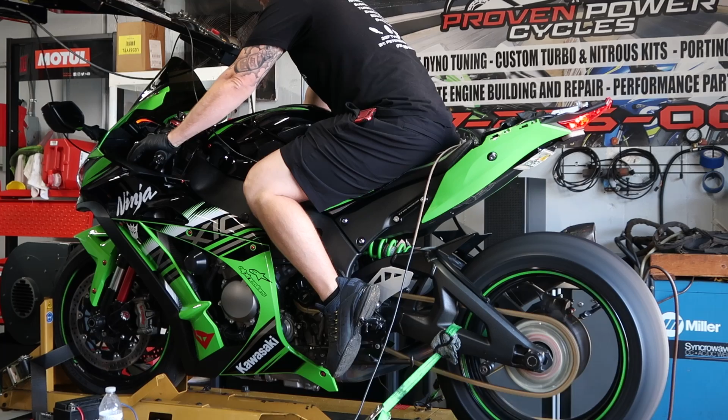It's an issue that a lot of people can't really catch until it's kind of too late. Can you spot it?

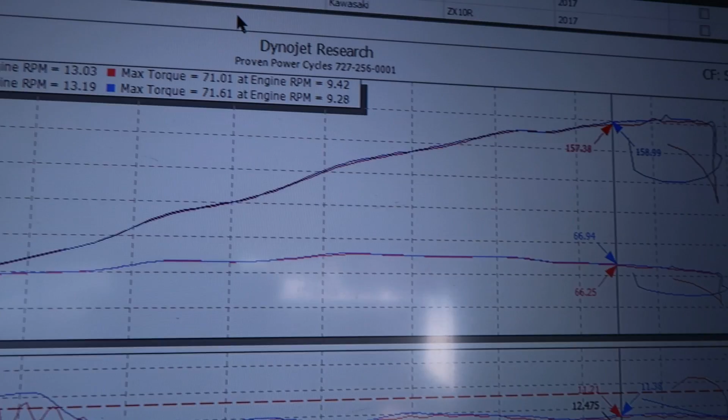I'll give you a hint. I'll let you look at this graph. I'll give you a couple of seconds. Can you spot it? Can you see any of the issues?

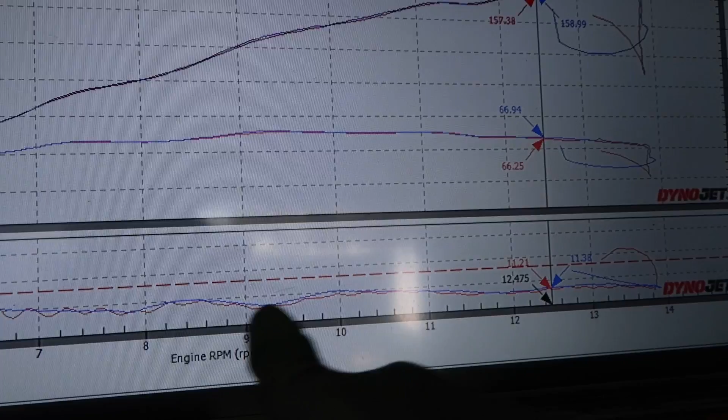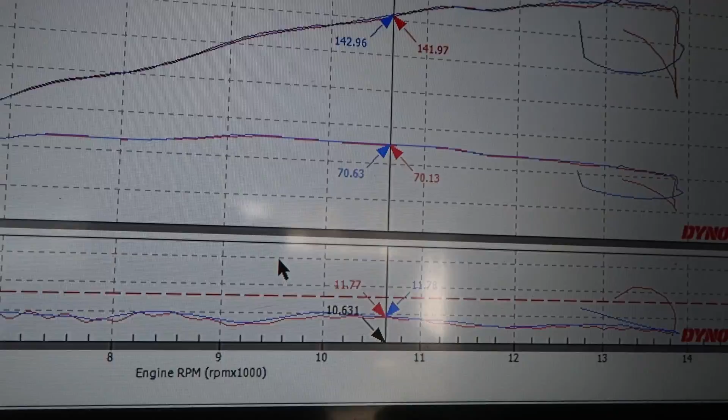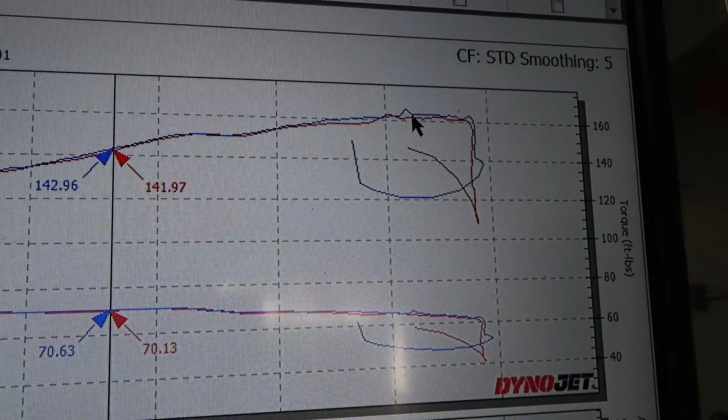There's a couple. We're running very rich, extremely rich AFRs. We're 11.2, 11.3, 11.1 all the way here at top end. We're at 11.7 here. It's just overall insanely rich. But notice right here, you see this dip down and then it comes here and you see these little peaks, how it kind of goes up into a peak and then it comes down, and then right here it kind of goes up into a peak and then flat lines again. That is a slipping clutch.

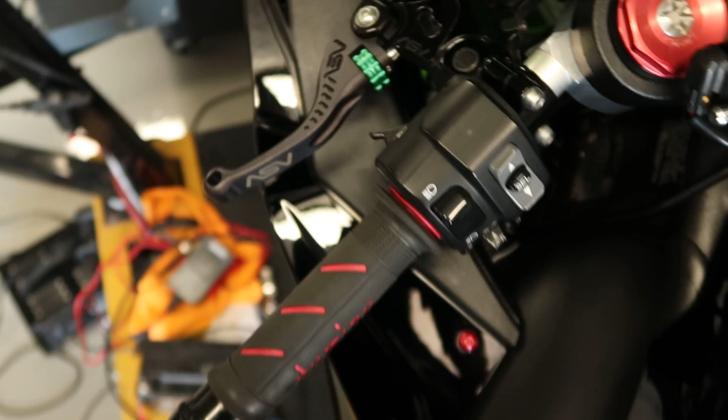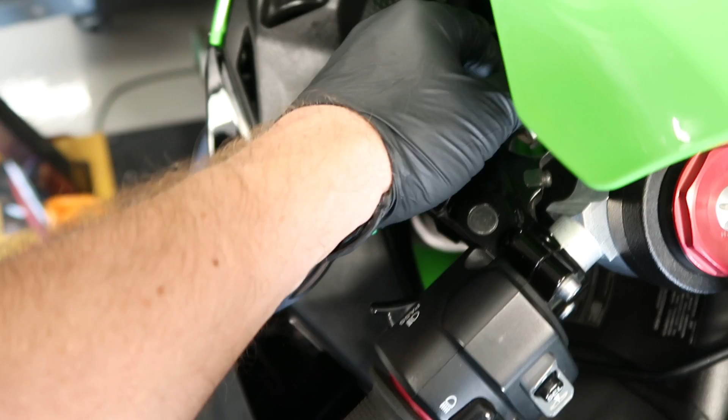That's how you diagnose a slipping clutch on the dyno. And it makes sense because as I felt this lever, look how tight it is. This thing is stupid tight. There's no play right here, right? You're supposed to have a little bit of play, and it looks like somebody already tried to do the adjustment on here. So what we're gonna do, we're gonna go through this real quick and we're gonna get this adjusted right for the guy and hopefully salvage this clutch.

So yeah, this is really tight. It's got a really stiff grab. Now I don't know if he's got any clutch mods, but just in general, this is way over tightened. Now some people do this thinking that their clutch is gonna grab harder. That's not the case. What's actually happening is you're not relieving the clutch plates of pressure.

So when you pull that lever in, it's supposed to release the clutch plates so they're not slammed together. Well, when you over tighten that, what you're doing is you're actually pulling and slightly separating the plates, so they're never fully grabbing. They're basically glazing each other. So it's gonna cause premature wear, it's gonna destroy the clutch, and way less mileage than it normally otherwise would be. Just because it's more or less like leaving your hand on the clutch slightly pulled.

It's more or less doing something like that. That's what basically you're doing when you over tighten the cable. Once we fix that, we're gonna rerun it again.

It is running a rich AFR no matter how you slice it. Air fuels are definitely rich, so it definitely needs a retune. I believe he said this bike was tuned already. I'm not sure, but no matter what, we need to fix this clutch issue, and then we'll go from there and address the tuning issue.

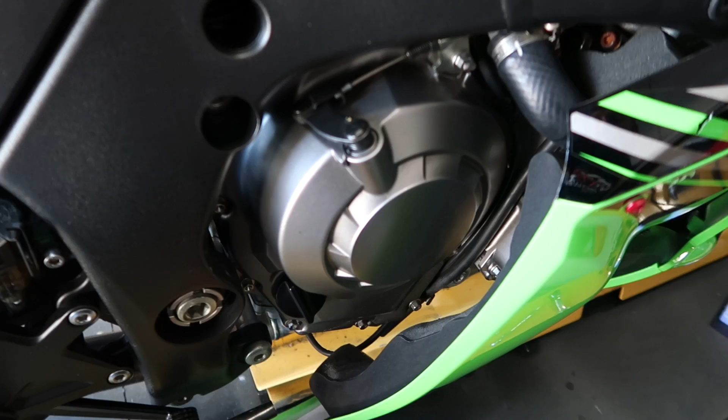So now I already adjusted it. Admittedly, it was pretty tight, but basically this is what you want it to look like. You want to have that little bit of play, okay?

When you over tighten the clutch, what you're doing is you're pulling this actuator arm in, right? So the tighter you pull, and here I'll show you at the adjustment up at the top. As I tighten that up, this line will get tighter and tighter and tighter, okay?

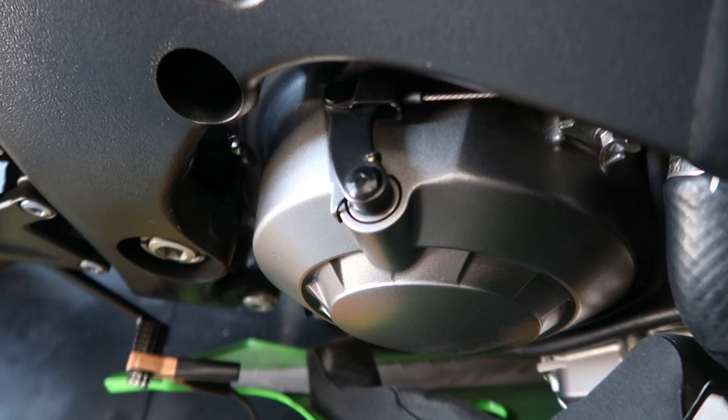And what ends up happening when you tighten this up, what do you think when you pull the clutch in? The clutch, the lever, and I'll show you, goes in, okay? That's me pulling on the clutch. I'm pulling the clutch in, I'm letting the clutch out, okay?

When you over tighten the clutch cable, you literally are pulling this as if you slightly have your hand on that clutch lever, okay? So I just wanted to show you guys a different angle of it, but more or less this is what you want. You want there to be just a little bit of play so you know that there's no pressure on that pressure plate and the clutch plates from that lever being squeezed in, or again, it being over tightened.

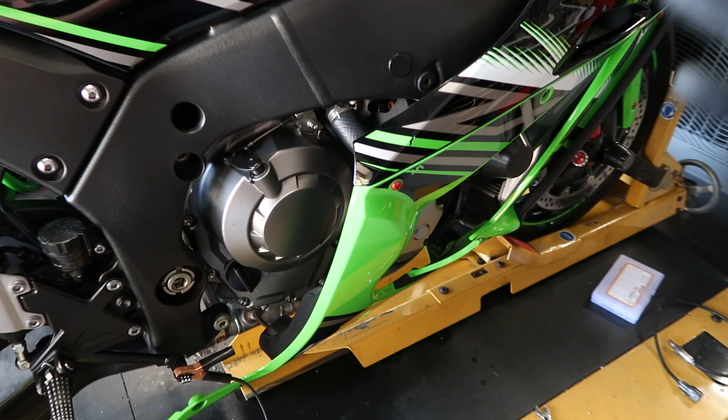If we're still having a slipping clutch issue, even though we just adjusted it and everything, if the clutch is already kind of gone and it needs to be gone through, I'm not gonna tune the bike. We're not gonna push it. I'm not gonna sit here and beat on it. There's no reason to do that.

All that's gonna cause is just more and more problems on the bike. We're just gonna be burning up little fibers and dumping it into the oil. So, you know, we're not gonna do that. That's not what I do.

So we're gonna check it. We're at least gonna check it. If the clutch is grabbing, everything is good, we'll say, let's go, we're fine, let's tune it. We're getting ready to re-baseline it again and see what it does now that the clutch is all adjusted. Hopefully this thing's salvageable. Hopefully I caught it in time. We'll see. Let's see what it does.

Alright guys, so it's been a little bit since the last little video that I just took, and I kind of wanted to catch you all up to speed. So we did resolve the clutch issue by readjusting the clutch. We got that dialed in.

The bike has been tuned before. There's plenty of signs in here. One of the most obvious ones was that when I went to go read out the ECU, it was locked by another tuner on the Woolich network. So we were waiting on Woolich to unlock the ECU for us. We got access to the ECU. We just rewrote our own little bench map in it. I have no idea how it's gonna perform, but let's see.

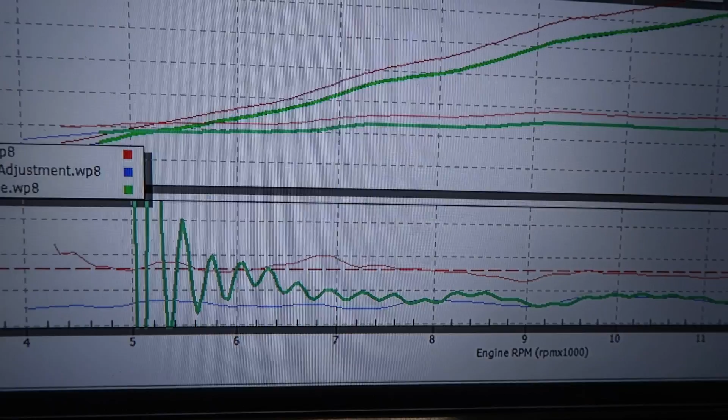Now, ignore the air fuel, we had a little issue with the sensor. It was kind of warming up still, it looks like, we were just having some glitches with it. So anyway, 162 with 71 foot-pounds of torque.

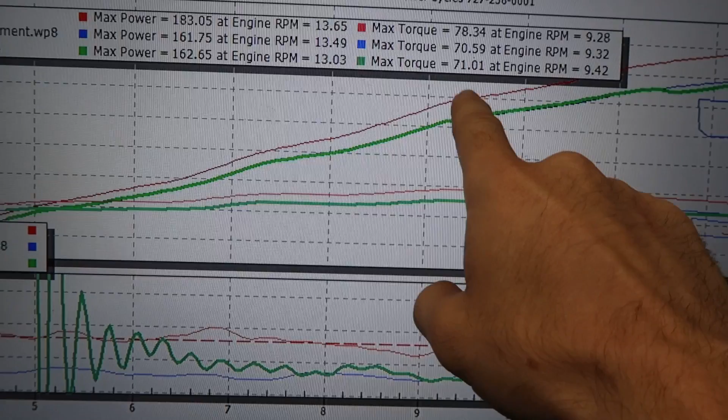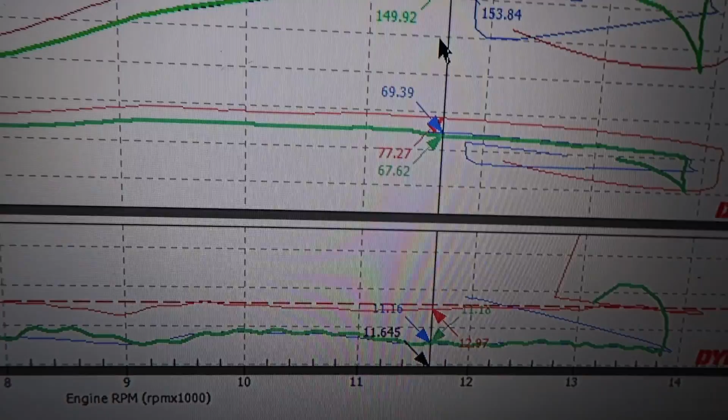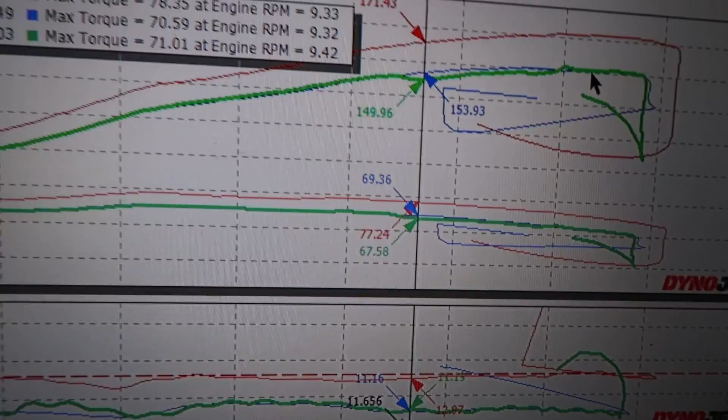And if you follow this green line, look right here, and right here is our, what mark is that, 11,600 RPM or so. I heard it on the dyno, and I remember mentioning this earlier in the video if you guys could hear it as well. And what I noticed is we had a slight odd pull, and if you look here how the power drops off, and then we have this little loop, and I showed you earlier, that looks like a slipping clutch.

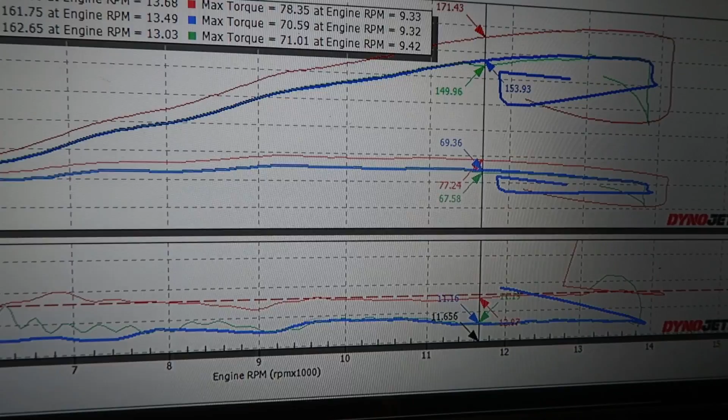Well, we went through the clutch. We obviously realized, hey, this clutch is not set up properly as far as the adjustment goes. Now, he had already put some miles on this thing, so who knows if there was an issue with the clutch, if we've glazed it or something like that, because over time you can do what's called glazing to your clutch. What that basically means is the clutch is never fully intact, like it's never fully smashed together plate on plate. So it's slowly burning the plate with oil mixing in with it. When you add a lot of heat with that oil, you'll get what's called that glaze. And it basically makes the clutch a little slick, and it never fully grabs to its full potential after that.

There's some tricks to getting it back. We have some tricks that we do where we can remove the clutch and kind of save it, if you will. But this was close enough that I said, hey, look, everything looks okay once we did the clutch adjustment, and it was holding good enough.

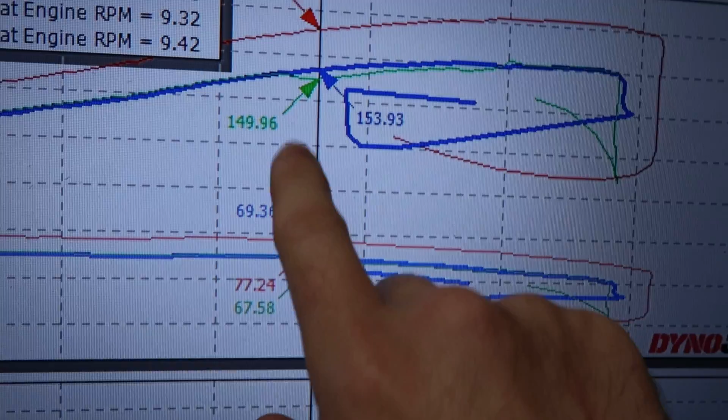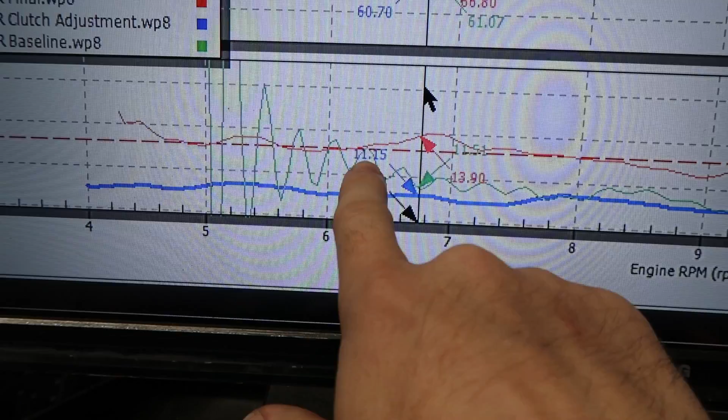Now, the other thing I wanted to mention is this. Notice now, after we did the clutch adjustment, we picked up an immediate four wheel horsepower gain right where it slipped. But look at the AFRs now, rich. We're down at 11.1 AFR, and at low end 10.8. Good God, this thing was drinking fuel.

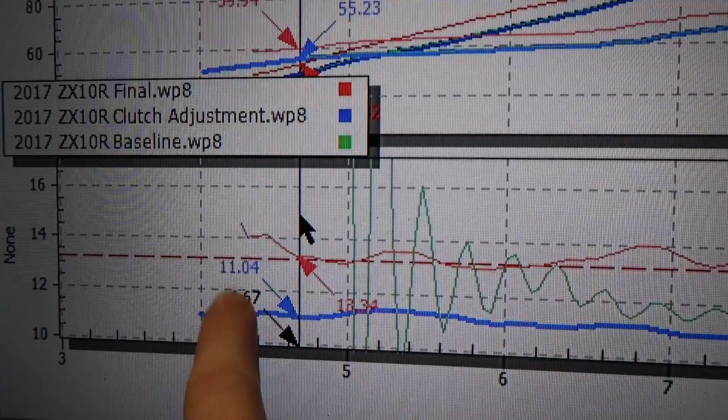Let's look over here, it could have been a mail-in flash, I don't know. 11 flat at the low RPM, that's god awful. Let's see what the stock looks like. Yeah, 10.99.

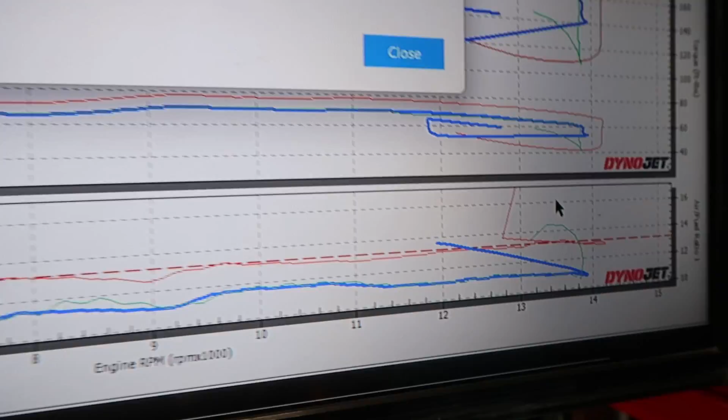Oh, that's shitty. So anyway, really bad, even at the high RPM. We'll even come up here at the high RPMs. Let's see, 11.1, 11.1, 11.0 AFR at 12K. Yeah, just horrible tune. So, and again, it could have been a mail-in, who knows.

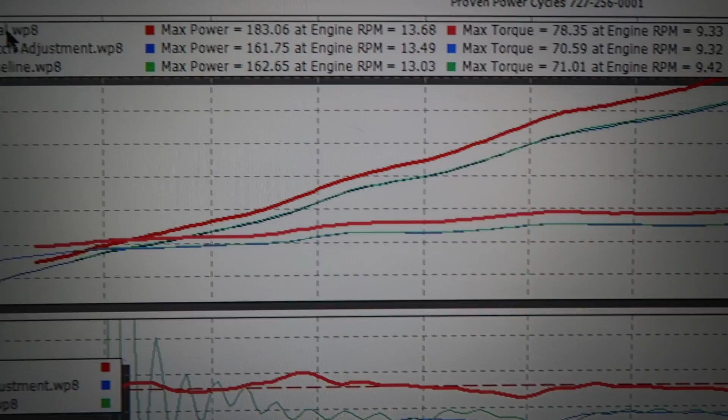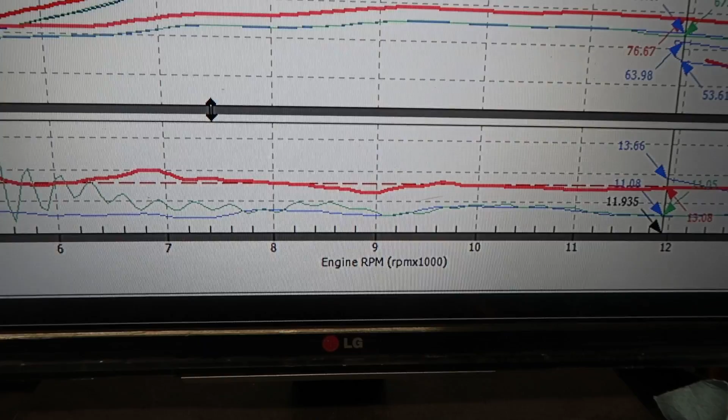And so now, after going through, we've adjusted the clutch, we've fixed the tuning. Now we did our final runs here, and we ended up with 183 wheel horsepower with 78 foot-pounds of torque. Now we have the AFR cleaned up a lot. Now granted, we have a little blip here, we added some fuel in there, and then we had this little rich spot right here. So we pulled some of that out right before he left, but admittedly, after fixing all of these issues, we did run pretty late.

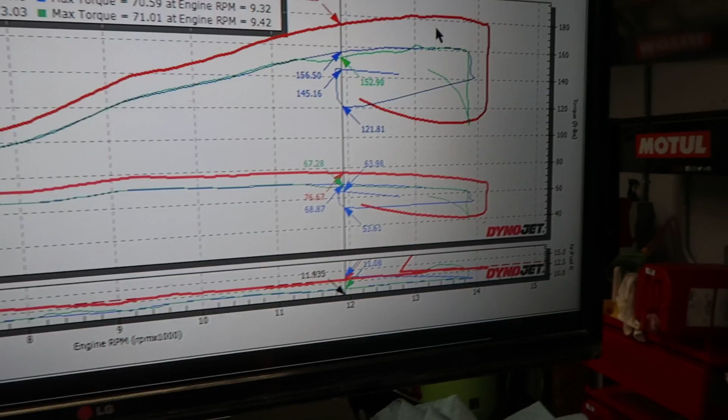So I was trying to get through this quickly, and I was trying to film at the same time. But either way, look at the final. We gained monumental power compared to what it was, 182 to 161.

Now, again guys, we did find other issues. I mentioned it earlier. We did realize also that his tire pressure was pumped up all the way to around 45 PSI, like 45, 46 PSI, which is insanely high, honestly. You're basically gonna roast the tire out on the street. If you're trying to roll into that throttle, it's gonna roast it. It has way too much pressure.

So we were at around the 181 wheel, 180 wheel mark. We dropped the pressure down to 35 PSI, and then we were able to pull out this 183. Again, I wanted to give you guys full insight as to what we did. Still though, it's still a 20 wheel horsepower gain compared to how he came in, without messing with that tire, without dropping the pressure on the tires. So, but again, major gains.

He has already messaged us back and he was like, dude, thank you guys so much. The bike rides incredibly better. In fact, he just left us a Google review. We really appreciate it. And you know, again, just the bike came out so much better than what it was. And it was a beautiful, beautiful Gen 5 ZX10. So I'm sure he's gonna be happy.

He said he wants to come back to do a few more mods. We're gonna do an airbox mod for him, the flapper mod for him. We got a few other little tricks up our sleeves that we're gonna do to help pull up that power. And with an oil change and some of these other things that he's gonna do, it should help clean up and make more power overall, because I'm sure this has got fuel in this oil based on how rich overall that bike was running.